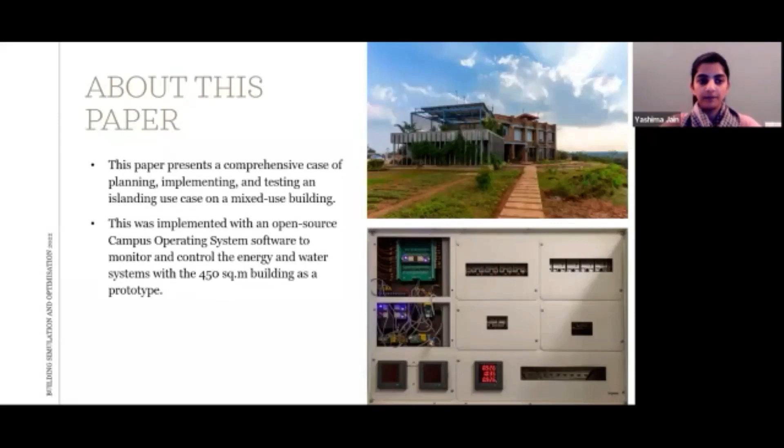A little bit about this building: it is part of a campus that embodies experimentation and mainstreaming of zero carbon and resilient development. It is a 450 square meter building with 2 stories, with an office and an environmental lab. The envelope is super insulated with efficient lighting and equipment. There's a PV array of 6 kilowatt peak and a battery of 14.4 kilowatt hours.

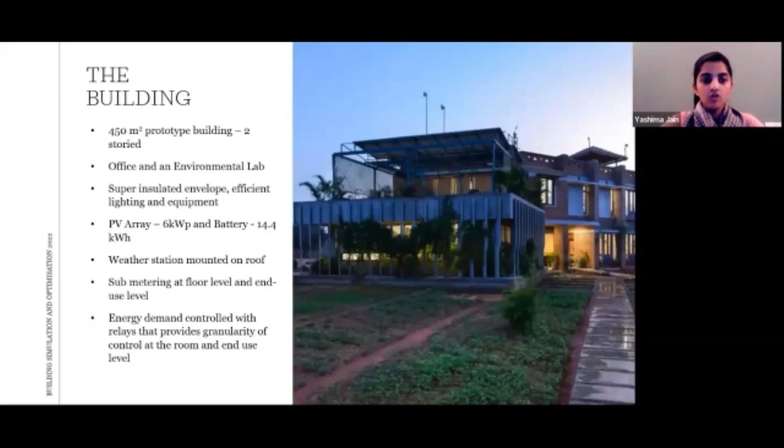There's also a weather station mounted on the roof, and sub-metering has been done at both the floor level and end-use level. Also, energy demand can be controlled at a granular level, so we can control energy at room level, end-use level, as well as floor level.

A little bit of background about this study: we all might be aware that India is on a path of major growth in renewables, against the target of achieving 175 gigawatts of renewable energy installed capacity by 2022. A total of 114 has already been installed as of June 30. This kind of penetration of renewables and an evolving demand of energy will eventually lead to the formation of a duck curve.

In developed countries, this problem has been tackled by using demand response and storage, and it has become an important part of the solution. But integrating this is definitely hard to achieve and challenging. It requires aggressive and intelligent power management along with real-time prediction of on-site renewable energy, and that's what we have done with our work, but at a very granular level.

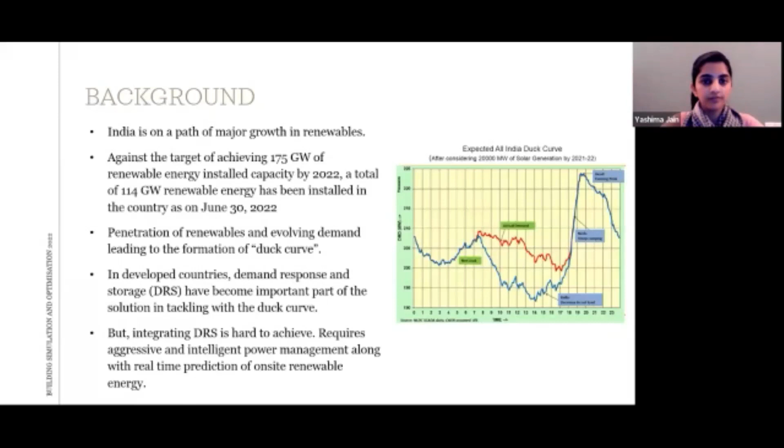I am now going to talk about the different steps that were taken to do this and the results that we achieved. The first step was the energy audit. We did an extensive energy audit to compare building loads with photovoltaic generation and understand the end-use, spatial and temporal energy use in the building.

All operational power was measured. For all equipment, light and fan, we measured operational power to understand the building loads. The comparison of the operational loads to be supported by the PV system gave the demand profile of the building when there is no grid power. The result was that building operations need more energy than that generated by the solar PV array. That's what we found out.

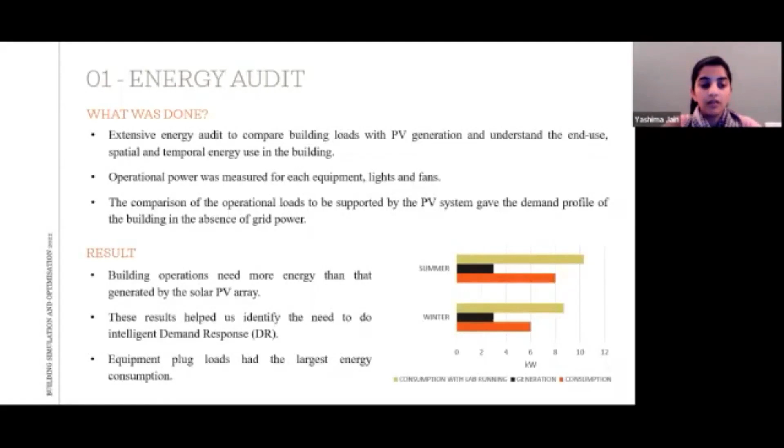The results helped us identify that we need to do intelligent demand response to cater to our energy demand, and equipment load proved to be a big guzzler. The graph on the right shows that on an average summer or winter day, generation is way lower compared to actual consumption in the building. If the lab is running, it goes beyond 10 kilowatts during summers. That's what we found out using the energy audit.

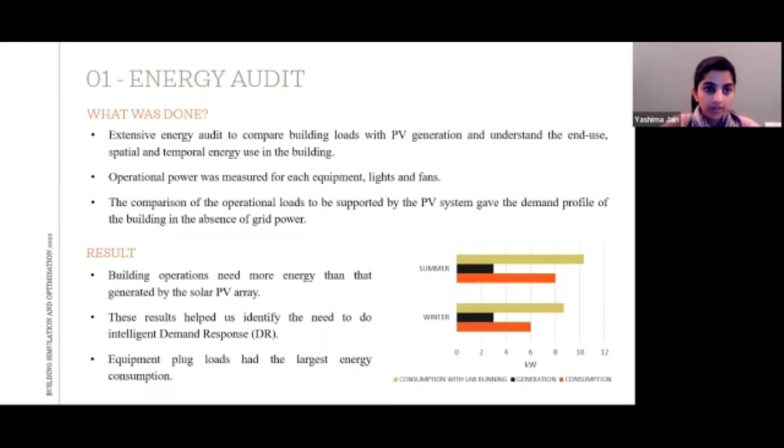The next step was to create critical load scenarios using the energy audit data and historic solar radiation. Load profiles defined critical functionality, and the idea was to create multiple operational scenarios to island the building in the absence of grid power. Inputs were taken from facility managers and users of the building to understand their requirements.

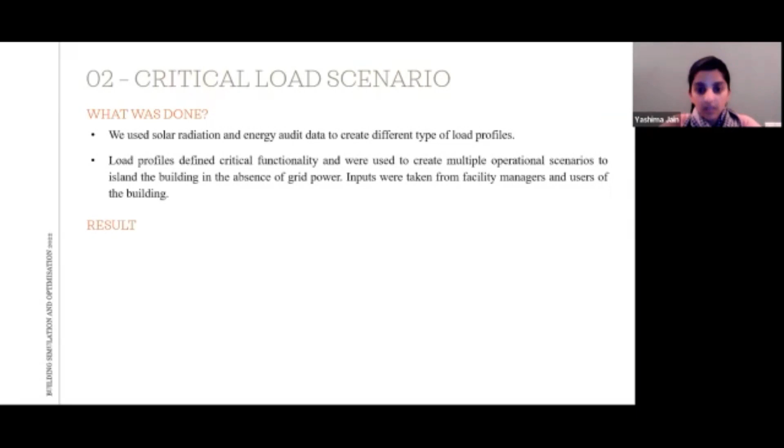These 5 ranges also helped us define the operational scenarios, which were red, orange, yellow, green, and blue, where red was the most critical scenario, where only critical equipment like IT and IoT was allowed to function.

Since equipment was a big energy guzzler, as we found from the energy audit, we managed equipment load by cycling them through the day for different kinds of uses in the building. Additionally, fans were also provided for thermal comfort in some scenarios.

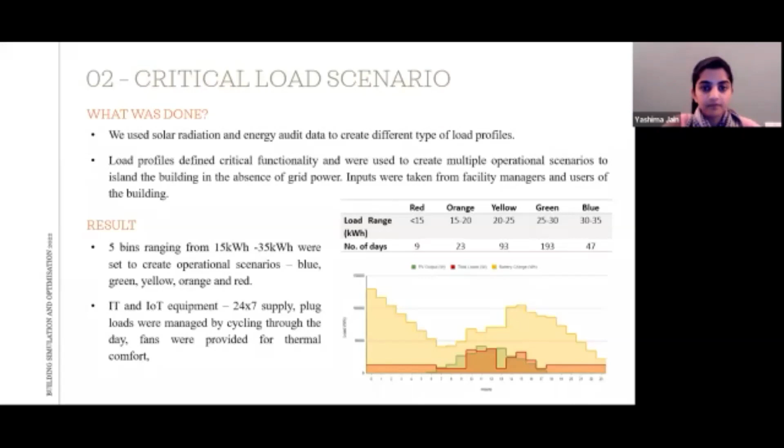The next step was to design the control architecture for this system. It was designed as a distributed system with multiple layers, and all sensors and microcontrollers were integrated in the hardware layer, which used Ethernet, Wi-Fi, or LoRa communication with the hardware. All recorded data was passed through cleaning scripts and then published to the Kafka framework at the local server.

The central server was maintained for high computational processing like artificial intelligence modeling and analytics. Coming to the results, the decision to implement a distributed architecture helped us take edge decisioning independently at the local server. The combination of Apache Kafka and MQTT proved to be a good combination for various IoT use cases, allowing us to process data in motion and not just restrict it to a pub-sub messaging level. This approach and the use of open source technology made the operating system scalable and extremely cost effective.

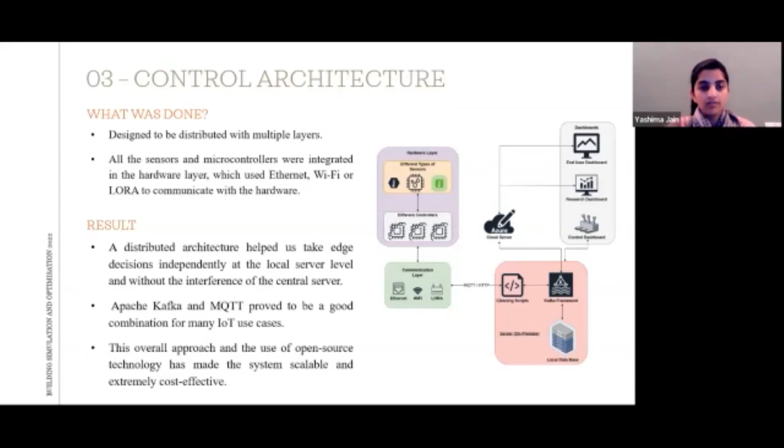The next step was software integration, where steps 2 and 3 were actually integrated. This led to the development of the operating system, where we had to align the operational scenarios from step 2 with the controls and relay architecture in the building. A part of this step was also to develop the user interface, with the aim of having an hourly level toggle for the 5 operational scenarios across different end uses as well as spaces.

Coming to the results, control at an individual equipment level was planned, but we did not implement it since it was not a scalable solution. We did control some high energy consumption lab equipment. Everything else was controlled at a floor level, room level, or end use level, including fans, lights, ACs, as well as equipment.

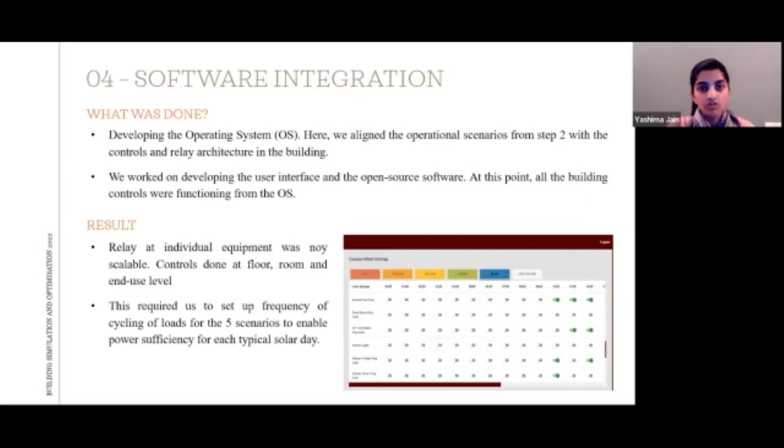The controls required us to set up frequency of cycling of loads for the 5 scenarios to enable power sufficiency for each typical solar day. The image on the right depicts the user interface on the maintenance side, which also shows the granularity of the controls developed to operate the scenarios.

Coming to the last step was the actual validation of all this work done, and we did that via actual testing in the building. As part of our methodology, we had set up protocols to test the functionality and validate the correctness at an hourly level.

The plan was to shut down grid power intentionally and let the OS take over and make decisions. The OS would decide what operational scenario the building should go into, based on forecasted solar generation for that particular day. The testing has been done twice so far and has proved successful, where the OS allowed the building to function based on the selected operational scenario.

In one of the testing sessions, the OS shifted the building into a green mode, where equipment functioned on a cycling basis for various uses as well as spaces. A combination of PV generation and battery was able to sustain the building functionality throughout the day.

The testing was done at an hourly level, where we logged the functionality of all end uses and checked for its alignment with the designed operational scenarios. This was also a validation for all our controls and their functionality.

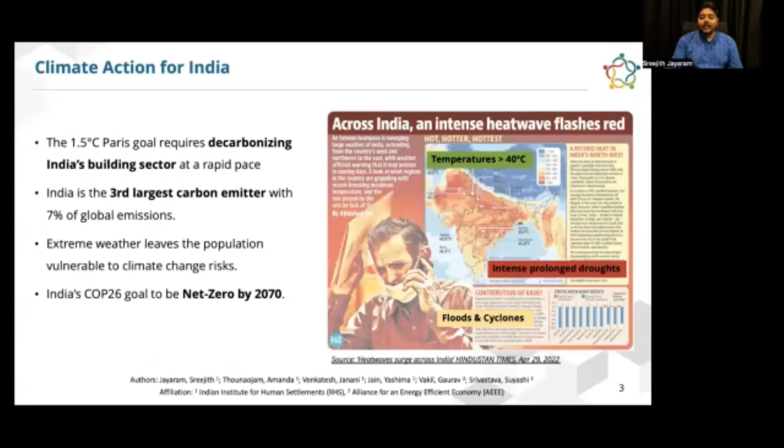This year at COP27, India has launched the In Our Lifetime campaign, which will recognize youth between ages 18 to 23 to become message bearers of sustainable lifestyles. In addition to the climate goals set by India for 2070, it is also predicted that India will add about 40 billion square meters of building area by 2050. These can be designed and built as net zero energy buildings.

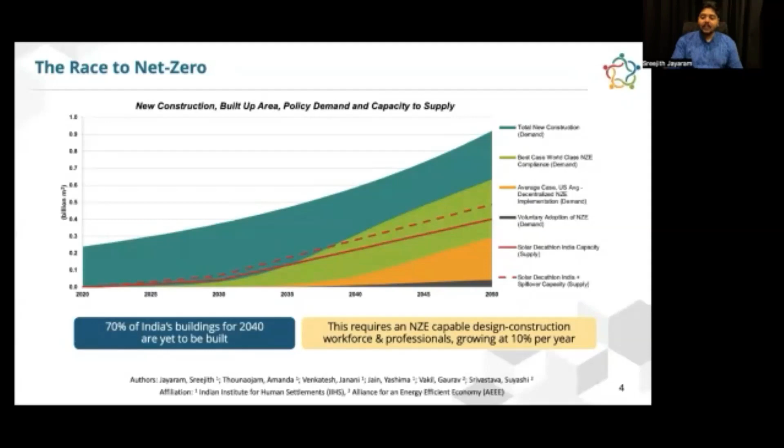In order to provide grounded evidence-based designs to achieve our ultimate vision of net zero. Training programs for building performance simulation have not captured the imagination of students or professionals to get them excited about the race to zero.

We are attempting to address this gap in BPS education through the Solar Decathlon India program. It is a competition for collegiate students to design net zero energy and water buildings. They work on live projects by partnering with real estate developers in the country.

Across the 2 years, Solar Decathlon India saw 2,200 plus students who participated in the program, partnering with real estate developers. The authors analyzed the work done by the finalist teams of both years. The teams worked on 10 contest areas, hence the term decathlon, and had to do well across all contests to win.

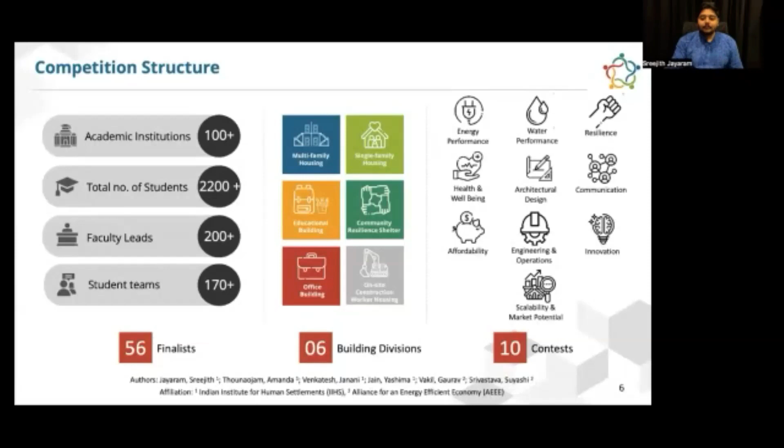In order to build the capacity for the teams to design net zero energy projects, the SDI program provided them various resources such as 10 online self-learning modules and webinars which mirrored the 10 contest areas of the competition. We gave them simulation software and calculation tools for costing and water consumption.

From the learnings of year one, the program provided BPS training to enable the teams to provide evidence-based designs. The teams had access to a technical resource group comprised of young professionals working in the industry. The real capacity building happens when the multidisciplinary team is able to apply these learnings to a real world problem which they worked on for the competition.

At the end of the finals, the authors wanted to know how well these teams were able to produce evidence-based design. As part of our analysis of student work, we wanted to know whether teams proposed energy conservation measures for their project, and importantly, whether the student teams were able to provide evidence in the form of simulations for the strategies they were addressing.

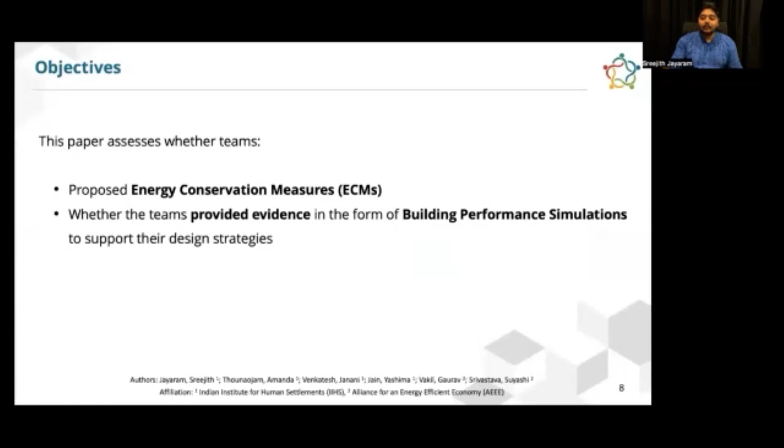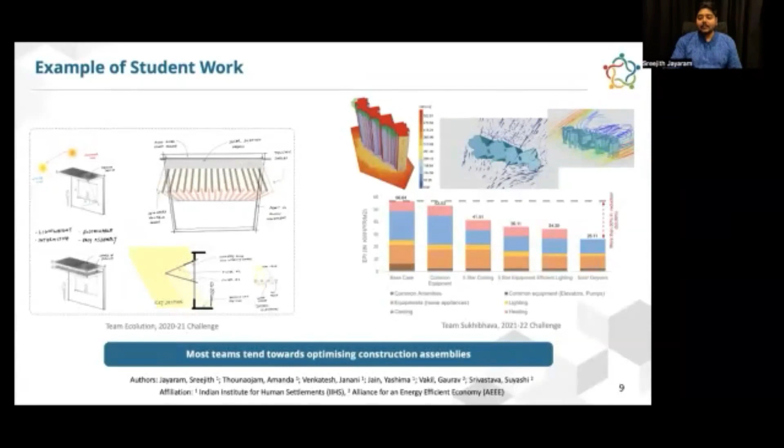We did a detailed analysis to look at the work produced by the students, which we will see now. Comparing the 2 years, we found that in total, about 86% of the teams proposed ECMs in their designs.

Similarly, there were about 12 to 21% more teams who provided BPS as evidence for strategies related to building envelope, which includes optimization of wall roof assemblies and shading. There were 10% more teams who presented BPS as evidence for passive design strategies such as form optimization and orientation of their building design.

There was a drop in the number of teams who provided evidence for window to wall ratio optimization of the building envelope. The percentage of teams providing evidence for HVAC strategies were roughly similar in year one and year two.

The natural ventilation strategies, which had the least number of teams providing BPS in year one, saw an 18% increase in year two. Overall, on average, there was about 12% more teams who provided evidence in the form of simulations for their proposed designs. There were some interventions and improvements that the organizers made in year two which may have yielded these results.

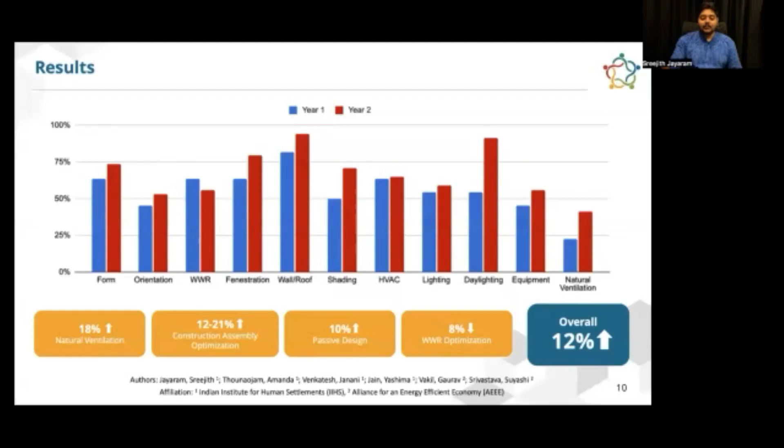Many of the areas of study are new to the teams and are not part of their existing curriculum. The teams were not aware of these topic areas and found it difficult to provide evidence. The teams may have had difficulties in receiving training in building performance software.

For year two, we included a 5-part simulation training program and faculty development program as part of the program schedule. We refined the requirements of the competition and made them more comprehensive.

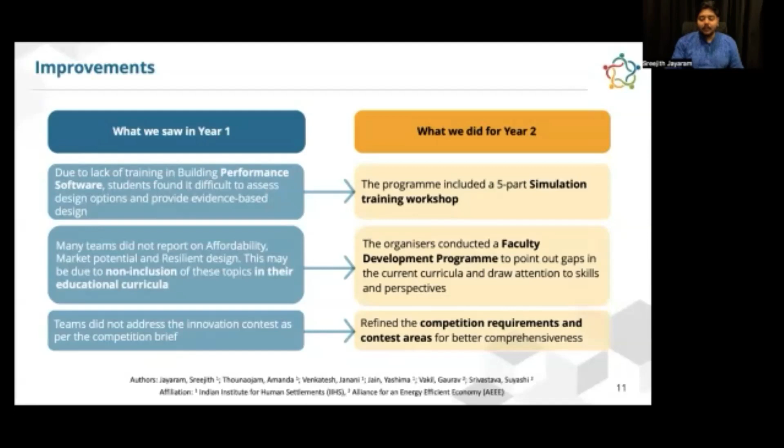Even though the organizers made improvements, a bigger change would be needed to have a larger impact. In India, the national statutory bodies which govern the technical education curriculum offer courses on climate analysis, passive design, and energy efficiency to architecture and engineering related coursework. However, these are not mandatory and are not comprehensive as well.

Specific coursework related to building performance simulation for energy, thermal comfort, daylighting, artificial lighting, and natural ventilation are not offered by the curriculum. As organizers, we look to further work on policy change for education and for market transformation in the building sector.

Comparing the student work in year one and year two, the program was able to see a 12% increase in evidence-based design by about 2,000 plus students. Bringing about a curriculum integration of the program can definitely amplify this impact.

The national statutory bodies will need to formalize BPS education to be able to do this curriculum integration. In the coming years, the organizers are looking to identify gap areas so that the teams will have access to more resources and better BPS education to help them arrive at evidence-based designs. The next generation will need to be prepared for the clean energy transition as well as for adaptation.

We are honoured to have Professor Rajat Gupta from Oxford Brookes University, who will be representing a team both from his institution and from the CLASP India programme and Environmental Design Solutions PVT Limited. Their study is titled Examining the Variation in Daily and Peak Electricity Use in Urban Indian Households by AC Ownership. Rajat, I could confirm we could all see your presentation. Brilliant, thank you, Kian, thank you for the introduction as well. So what I'm going to do is present this live and talk a bit about the work we are doing as part of a larger Indo-UK project called Reside.

Here we focus on a data set provided to us by CLASP India and the Environmental Design Solutions. The focus is to look at the variation in daily and peak electricity use across a small sample of urban Indian households by extent of AC ownership. So what happens if you have one AC unit versus two, or three or more.

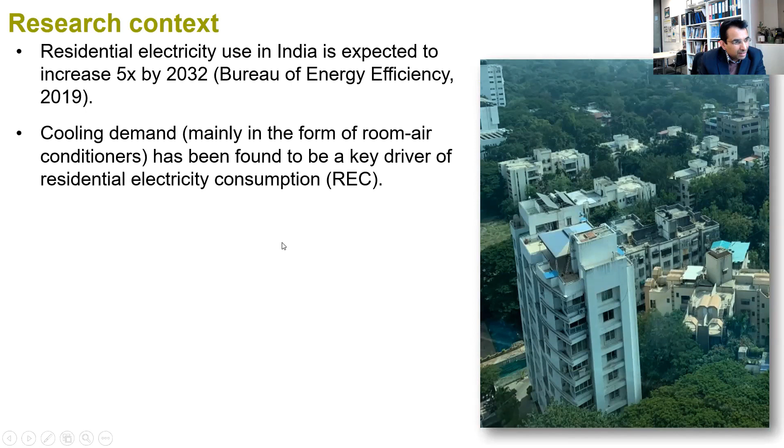To give a bit of research context, residential electricity use in India is expected to increase 5 times by 2032, according to the Bureau of Energy Efficiency's estimate. We also know that cooling demand mainly comes from room air conditioners, which is the key driver for residential electricity use in India.

This is happening despite a couple of facts. First, India has one of the lowest access to cooling across the world, with per capita cooling consumption just under 69 kilowatt hours against a global average of 272 kilowatt hours. This fact was also stated by one of the keynote speakers. Also, India has the highest distribution of cooling degree days anywhere in the world, meaning this is likely to increase with a warming climate. So the situation is only going to get worse from a climatic point of view.

At the same time, it is predicted that air conditioner sales are going to explode from 42 million three years back to about 240 million. That's a lot of increase, just under 6 times. So clearly, there's going to be a significant rise in residential electricity use in India.

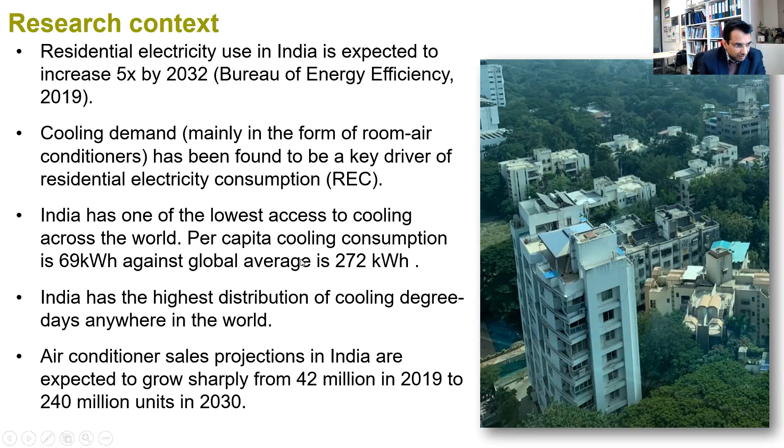It's very important and probably necessary now to examine the pattern of residential electricity consumption, not just from models, but from actual empirical data, to really identify the peak periods of electricity use, so we can develop measures to either reduce its use or at least manage it so we don't cause brownouts and blackouts.

So what we did here was conduct statistical analysis of high resolution time series data on electricity use. Essentially, we looked at the variation in daily and peak electricity use by seasons, summer and monsoon, since that's where most of the air conditioning is likely to happen.

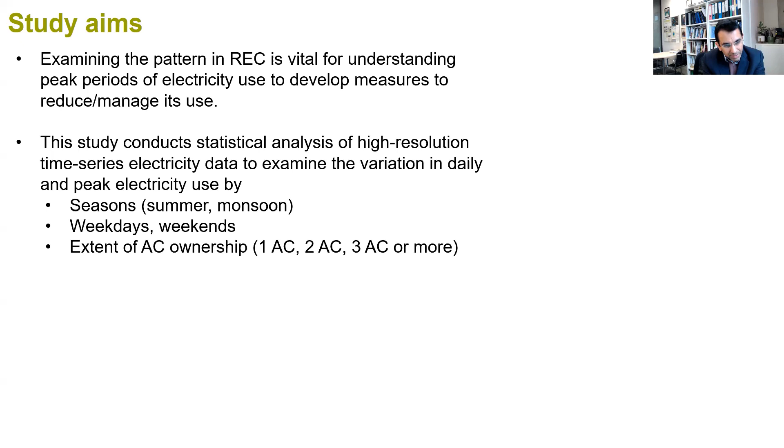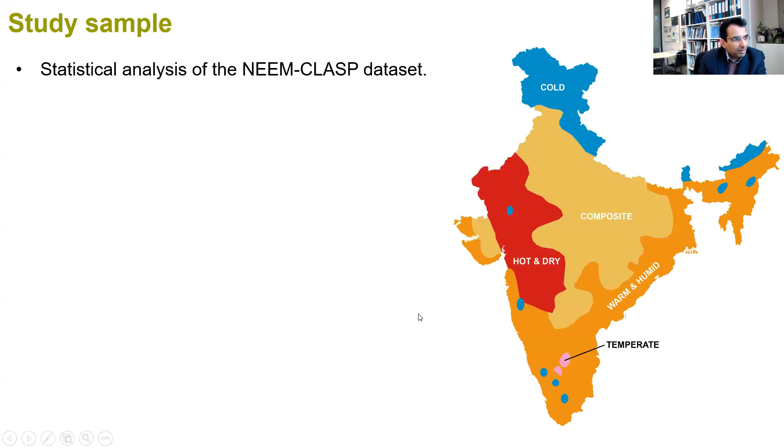The study is part of this wider 5-year project called Reside, with colleagues in MNIT Jaipur and IIIT Hyderabad, and there's a whole website. I think we're going to talk about some of these projects tomorrow. The study sample was really based on the data set provided to us by NEEM CLASP.

The households were located across 3 climatic zones where air conditioning use is dominant: the composite zone, the warm humid zone, and hot dry. That largely covers most of geographical India. There's obviously the cold zone where hopefully we don't have that much air conditioning, and a little bit of temperate zone.

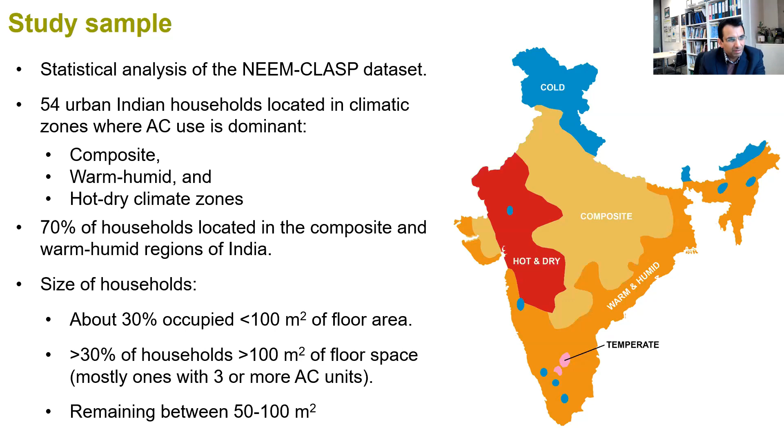70% of the households in the sample were located in the composite and warm humid zone, and the remaining 30% were in hot dry. In terms of size of households, they were between 50 to over 100 square meters — 30% less than 100, 30% just over 100, and the remaining 50 to 100 square meters — similar to other studies done nationally in terms of household size.

In terms of methods, we had time series data collected every 30 seconds between January to November 2018. This is pre-COVID, so we didn't have that influence of home working yet. The data collected included electricity use, peak demand, power factor, voltage, and frequency.

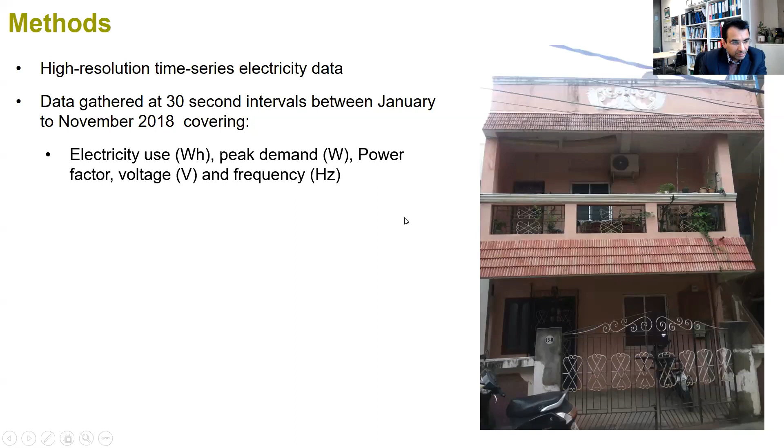We then conducted cluster analysis using K-means to identify typical profiles of electricity use. We presumed that the summer season, which can differ since India is a vast country, was essentially the drier season, April to June, and the monsoon season from July to September, where humidity is high but ambient temperatures are slightly lower than summer.

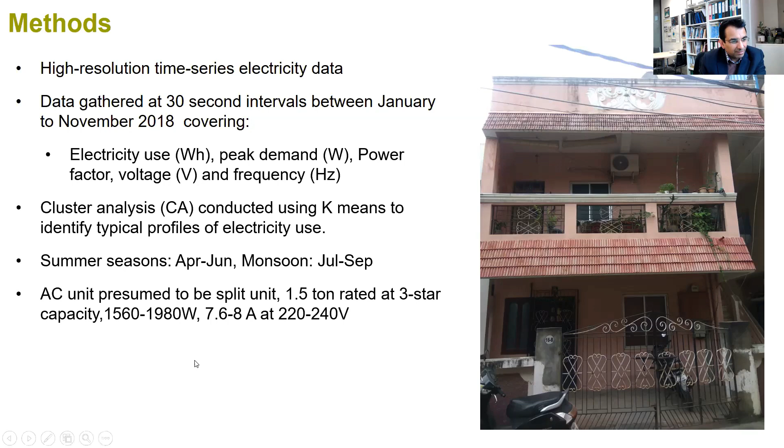The dominant form of air conditioner unit present in the sample was a split unit, about 1.5 tons and 3-star rated. The amperes it has is 7.6 to 8 amperes, which we assumed to predict the air conditioning usage.

We looked at the compressor on-off cycles, and by locating those events within the electricity current, we could predict when the current increases above the rating of a 1.5 ton air conditioner. For over 30 minutes, we knew that the air conditioning is coming on. We then automated that process for the entire data set, so you can imagine there was a lot of data to look at.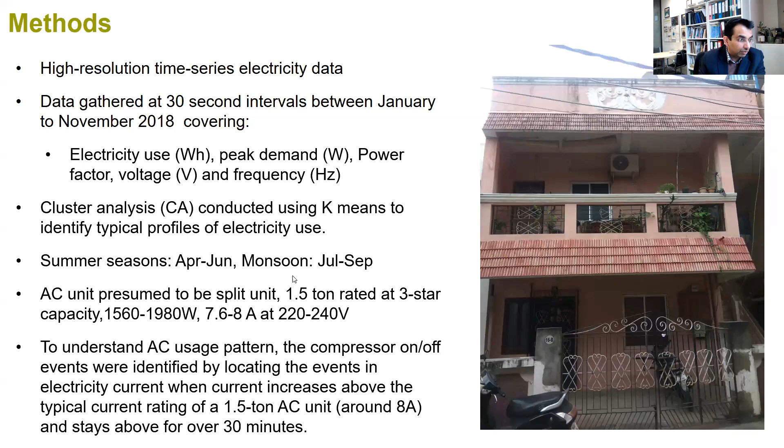I'll go into the results now. Looking at the variation in annual and seasonal electricity use, it was evident that there was variation as you move from homes with one air conditioning unit to 3 or more. That became obvious whether you look at mean annual electricity use, which goes from 3,500 kilowatt hours to 5,500 kilowatt hours for 3 or more AC units, or mean daily electricity use, where 19 kilowatt hours for 3 or more ACs is double that of a one-AC household. Even when you normalize by area, you get very similar results.

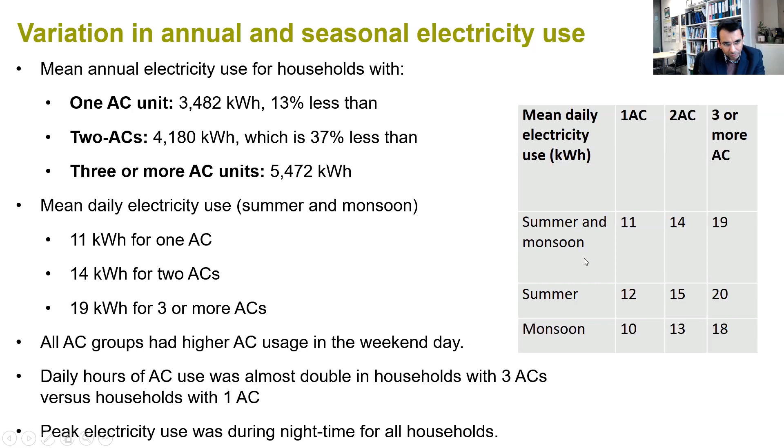This happens whether you look at summer and monsoon season combined, or summer or monsoon separately. Most of these households had higher AC usage during the weekend, and the daily hours of AC use in households with 3 AC units was almost double that of one AC. Most of the peak electricity use was during nighttime, and I'll talk more about that in one of the slides later on.

When we talk about air conditioning electricity use, the summer and monsoon seasons accounted for about 60% of annual electricity use, so this is a major period of electricity usage. Air conditioning use in households with 3 or more AC units was about 43% of summertime usage, and about 34% in the monsoon season - slightly lower in the 2 AC and 1 AC households. So as India starts to urbanize more and multiple air conditioning units tend to get installed, the situation is going to get much worse.

For the moment, there is no centralized air conditioning in homes - majority-wise it tends to be room-based. The mean annual contribution of AC use as a proportion of annual electricity use is about 10% in a 1 AC household, increasing to a quarter, 25%, in 3 ACs. So there's a big difference as you have more AC units.

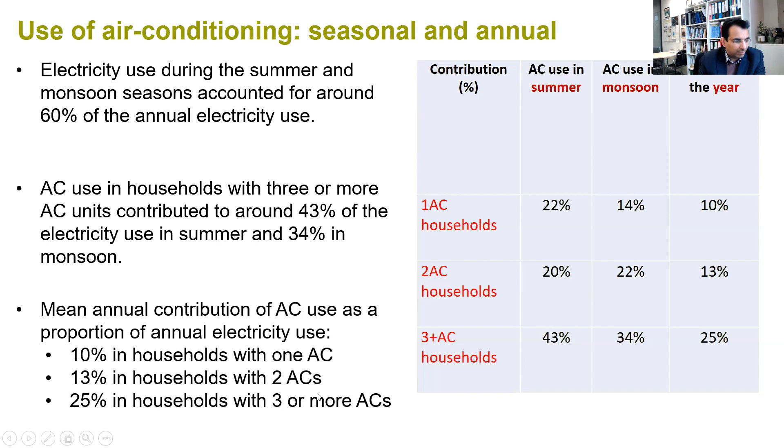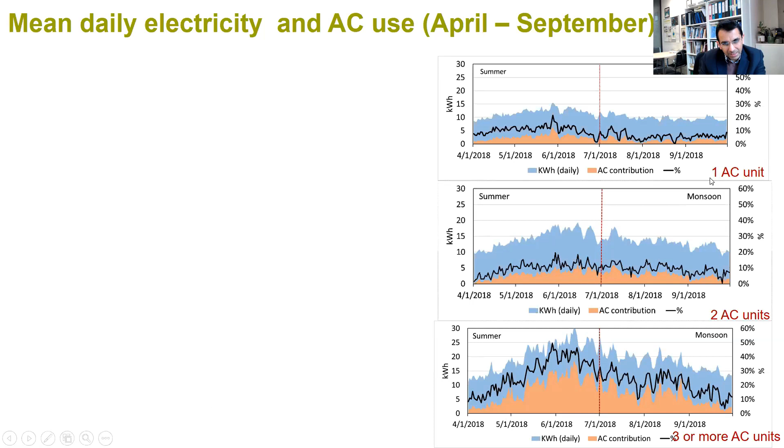We then plotted the entire data set, from April to September, to look at how electricity use overall was varying - what was the air conditioning use in a 1 AC unit dwelling, 2 AC, and 3 or more. We wanted to see for how much time air conditioning had been used in these 2 seasons, and it was up to 38% - a significant amount of time.

What's interesting is that daily electricity use and proportion of AC use is higher in summer than in monsoon season. This is interesting because in the summer season, which is drier, you could have other means of providing comfort, like an evaporative cooler, since you don't have as much humidity compared to the monsoon. So there are areas for saving energy there.

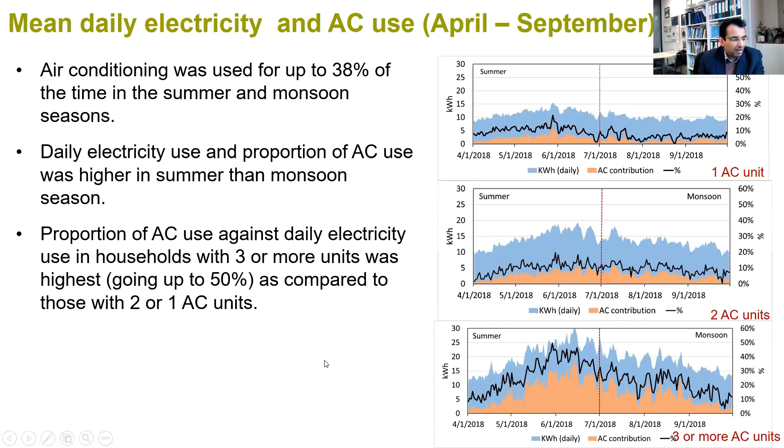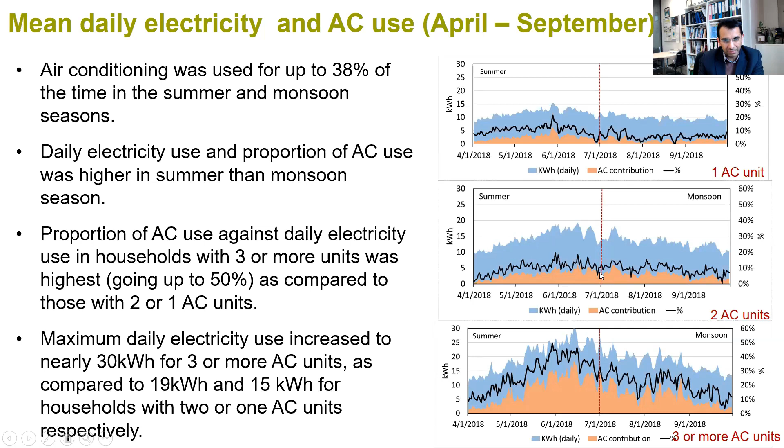When we look at proportion of AC use against daily electricity use - the amount of AC used over a day - especially in households with 3 or more AC units, it can go up to 50%, as you see here, compared to those with 1 or 2 AC units. The maximum daily electricity use in 3 or more AC unit households goes up to 30 kilowatt hours, which if you read off the y-axis, is double that of 2 AC and 1 AC units, which stays around 15 or under.

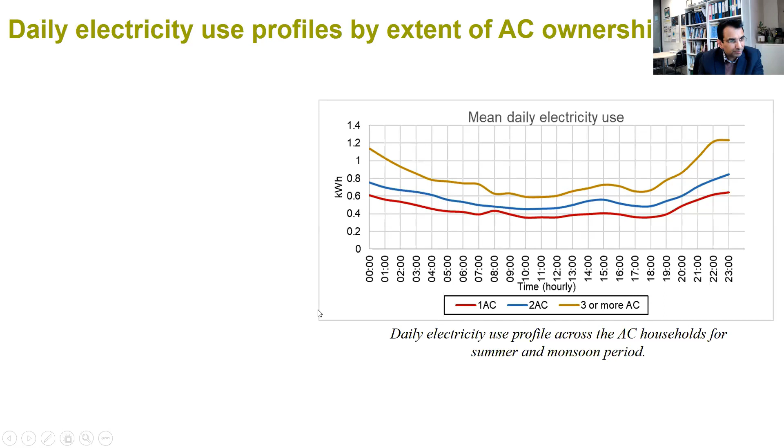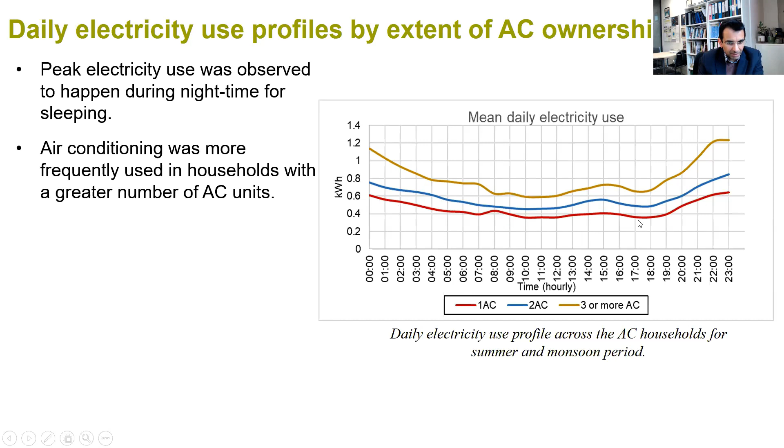Then we started to look at daily electricity use profiles, because we wanted to see what magnitude of electricity use was happening and when. As I said, peak electricity use was observed to happen during nighttime, essentially for sleeping purposes. Looking at air conditioning across these three lines - one for one-AC dwellings, one for two, and one for three or more - although they have a similar trend, you can see AC is used more frequently in dwellings with three or more AC units.

When we look at the amount of electricity used during the peak period, in three or more AC unit dwellings it's about 6.3 kilowatt hours, versus 4.6 kilowatt hours for two AC units and one AC unit dwellings. The most frequent usage of AC was recorded at nighttime from 8 p.m. to 2 a.m., for overnight and late evening activities.

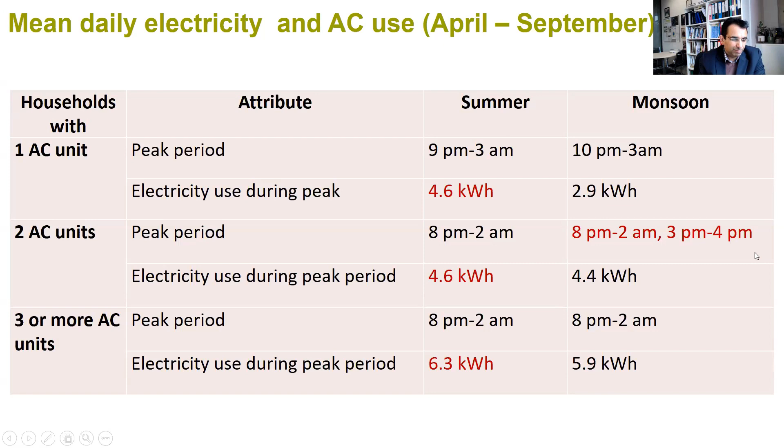This table clearly shows that 8 p.m. to 2 a.m. is really the peak period of electricity use, largely for air conditioning. But there's also an afternoon period where air conditioning is used, probably for resting purposes.

We also ignored the 1, 2, and 3 AC groupings and just took the 54 dwelling sample and applied cluster analysis to see what kind of clusters we get and whether they'd differ in terms of indoor electricity use profiles. Actually they weren't very different. Two clusters emerged, and again they have very similar profiles in terms of late night peak period.

So essentially that provides an opportunity for some management of air conditioning in smart ways to reduce its usage.

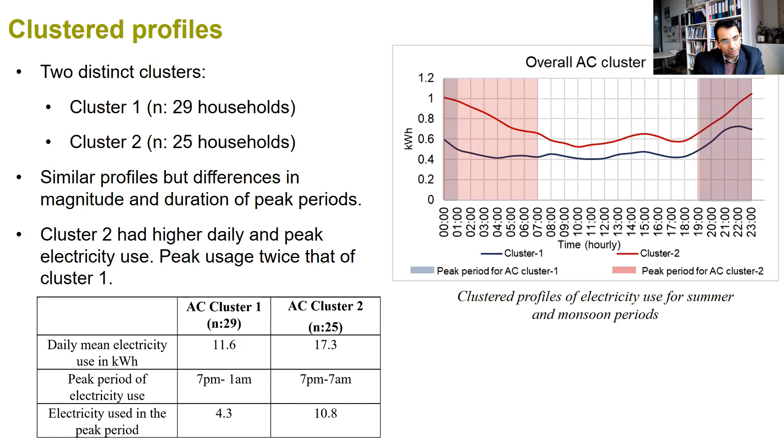What's interesting is cluster 2 had mostly 3 or more AC unit dwellings, and there the magnitude is much higher than cluster 1 in terms of electricity used during the peak period. The daily mean electricity use of cluster 2 is pretty high, around 17.3 kilowatt hours versus 11.6 in cluster 1. So the point is that even if dwellings are air conditioned, within that grouping you can have a lot of variation depending on the number of air conditioning units present.

So what are the key findings and implications of this? It's very data intensive, with a lot of data crunching going on. But what are the key takeaway points?

First, seasonal differences matter in India - summer and monsoon season contribute about 60% of annual electricity use. We also know AC usage in these seasons contributed around 25% of annual residential electricity consumption, and about 50% of daily electricity use on some days.

The extent of AC ownership matters because households with 3 or more AC units can have double the daily, seasonal, or annual electricity use compared to one-AC households. That's a really interesting finding because most households will be progressing from 1 to more AC units. Similar patterns of AC use were observed in summer and monsoon seasons for all households, irrespective of the extent of AC ownership.

There is a nighttime peak, although the magnitude of that peak and the peak usage period might be slightly longer or shorter depending on the extent of AC ownership, but the trend remains the same - mainly concentrated during nighttime from 8 p.m. to 2 a.m., with an hour of peak use in the afternoon in some dwellings.

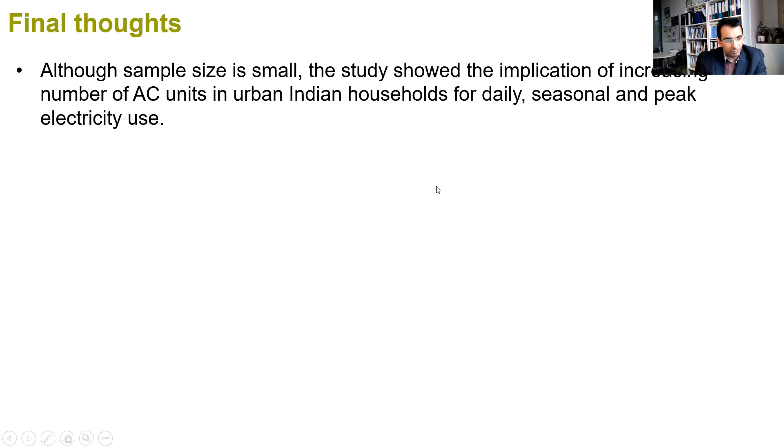So what do we take away from this? First, there's obviously a limitation that this is a study with a small sample size of 54, although the amount of data collected is very data intense and in depth. It does show that if you increase the number of AC units, there are huge implications for daily, seasonal, and peak electricity use, which has implications for the local electricity network.

Some effort needs to be made to increase the use of desert coolers, for example, with fans possibly during the summer season where humidity levels are lower, and that could reduce the usage of air conditioning, especially in homes with 3 or more AC units.

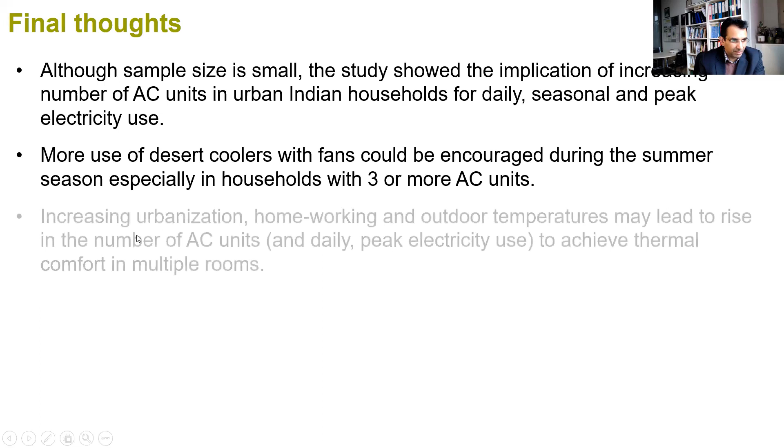We also know this is going to get much more difficult to manage because with increasing urbanization, home working as a result of the pandemic, and outdoor temperatures rising due to a warming climate, that will lead to a rise in the number of AC units to achieve thermal comfort in multiple rooms. So essentially it's no longer going to be just one living room or a bedroom - multiple spaces might start getting air conditioned, and this is already happening. We've recorded about 10 to 12 AC units in one dwelling as well.

So this is getting to a point where it needs to be managed, because policy measures could be targeted based on the extent of ownership of AC units, so that peak load management could be done through demand side response.

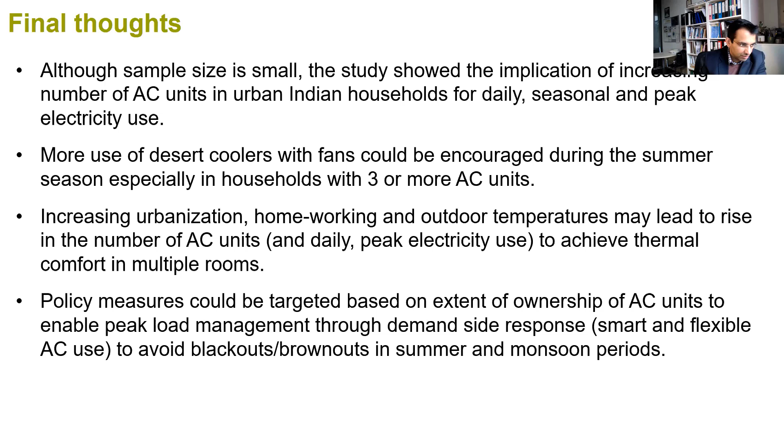Because some amount of air conditioning is probably going to happen, smart and flexible AC use is becoming necessary - managing air conditioning in line with external weather and grid signals so we can avoid blackouts and brownouts. Maybe the new generation of AC units need smartness built in alongside their Energy Star ratings. Without a robust demand side response strategy, driven by time of use tariffs, other DSR signals, or availability of renewables locally in the grid, electricity distribution companies in India may need to make expensive and disruptive reinforcements to the network, and that's something to be avoided. If we can manage this smartly and flexibly, avoiding the increase in number of AC units and keeping it between 1 and 2, that could halve the increase in electricity use expected in India over the next 10 years.

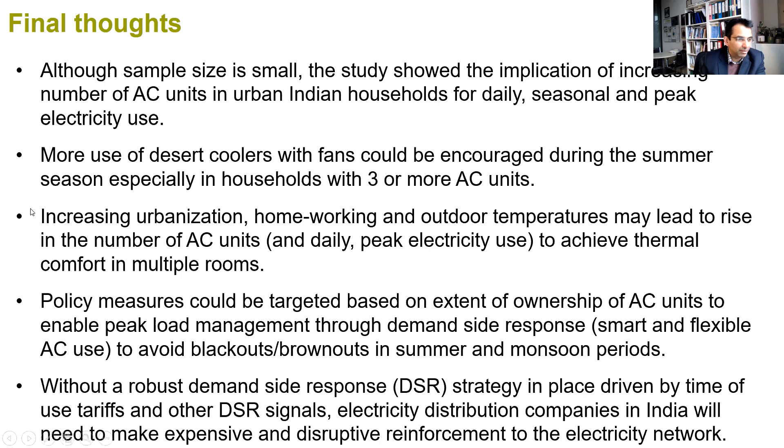Thank you very much. I'm going to stop because I cannot see anybody and I'm sure I've run out of time. I'm going to stop sharing as well.

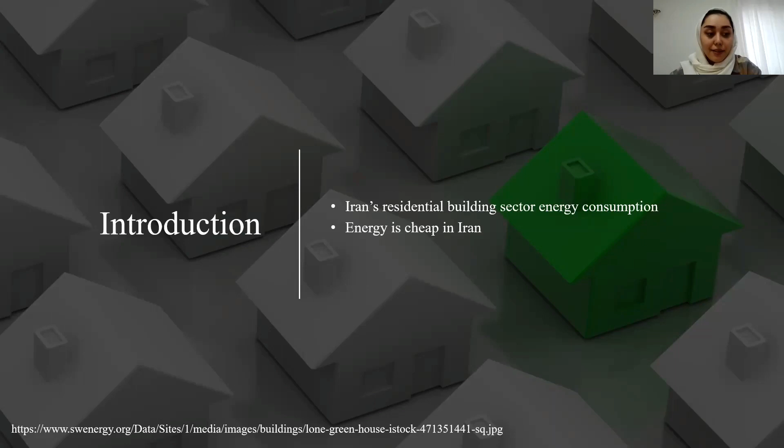The research objective of this study is to retrofit a residential building in Tabriz, Iran, to show the importance of sustainable retrofit for decreasing building energy consumption and CO2 emission, and also to determine the most effective scenario to get the best result.

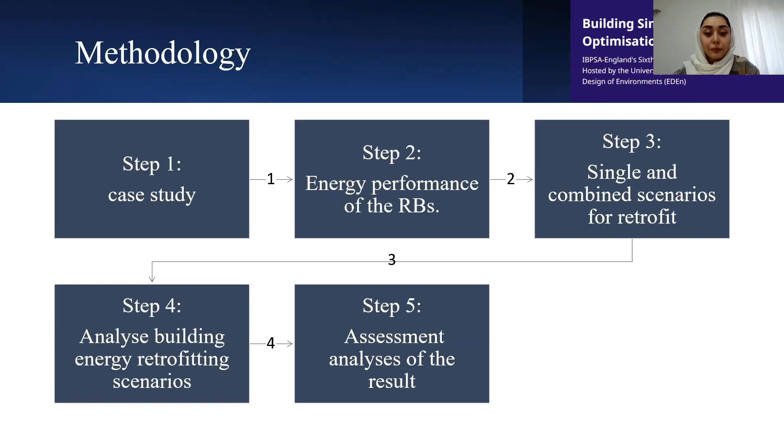To fulfill this research objective, 5 steps are needed. The first step is to determine the case study building and the climate conditions. The second step is to calculate the energy performance of the RBs - we call it RB because it's a reference building. In the third step, determine the scenarios, which is the combination of single and combined scenarios. The fourth step is to analyze building energy retrofitting scenarios, and the last step is to perform assessment analysis of the result. So let's look at the case study.

The case study is located in Tabriz in the northwestern part of Iran, which has a cold and dry climate. The average daily temperature in summer in Tabriz is 27 degrees, and the average daily temperature in winter is equal to 8 degrees. This is the residential building - it has 4 floors, each floor has an area of 183 square meters. This case study was modeled with DesignBuilder software.

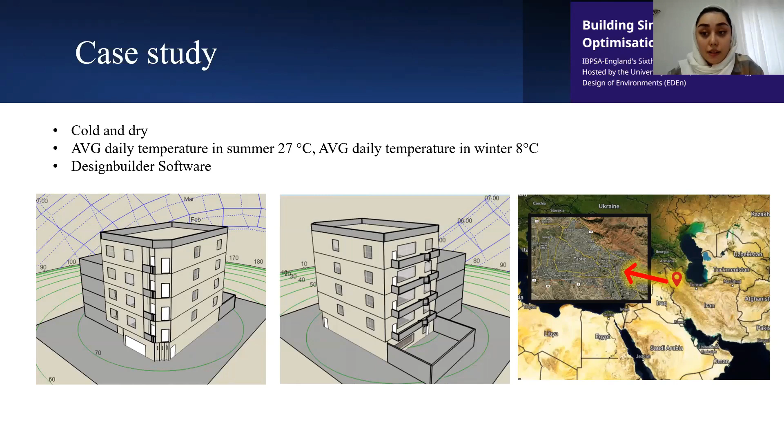4 scenarios have been considered. The first scenario is the combination of replacing single windows with double glazed windows and adding some shading elements on the south facade. The second scenario is about replacing lighting fixtures with LED and applying some wall insulation. The third one is about applying PV panels on the roof and again wall insulation. The last one is the combination of all the above scenarios.

Let's look at them in a little more detail. In the first scenario, we assume that double glazed windows replace the single glazed windows, with 30 millimeter argon gas. The shading elements are located on the south facade at 30 to 35 degrees, which work only during the summer period. In the second scenario, LED lighting fixtures replace simple incandescent lamps.

As you know, LED lamps can save energy from 30 to 90%, and LED lighting is mercury-free. They also generate less heat, so it's really good for sustainability.

For external insulation, I'd like to show you these figures. The left one shows the wall detail before applying insulation, and the right shows the detail after insulation. The insulation material is expanded polystyrene with 10 centimeter thickness, which can save a lot of energy.

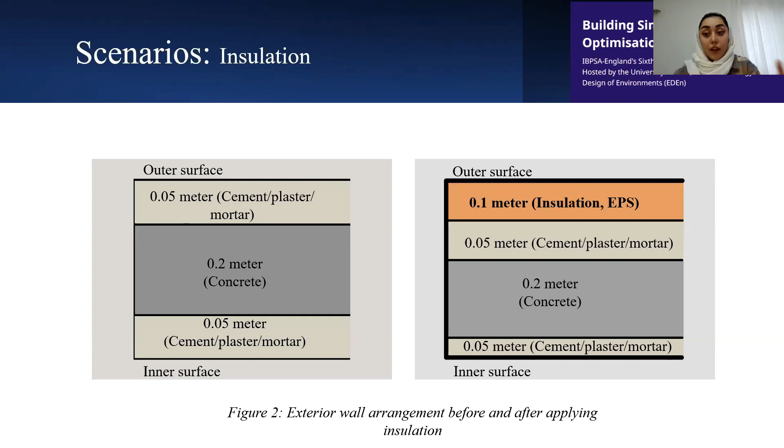Back to the third scenario, which is the combination of PV panels and insulation. I'd like to show you Iran's high potential to use PV panels, which is why we used PV panels for this case study. 54 PV panels have been applied, and the panel size and information were calculated with the PV*SOL software.

Here is the result of CO2 for the reference building and scenarios. As you can see, in this third scenario and the combination, the last one, the amount of CO2 from May to October is negative. Again, given that it's impossible, this refers to the net energy building for carbon.

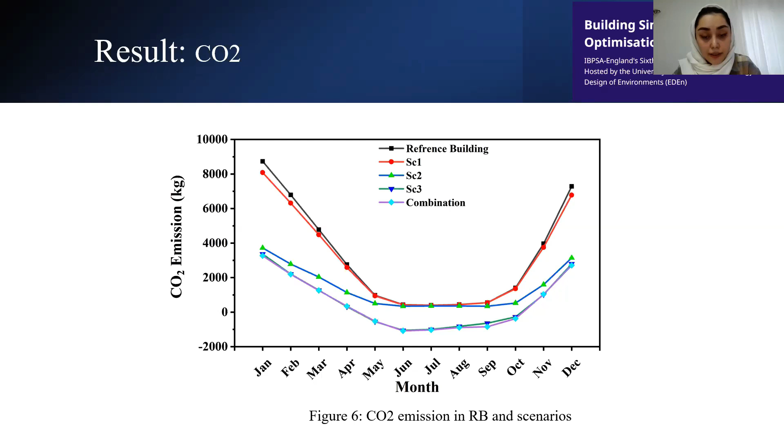So by lowering heat loss, insulation reduces the demand for gas or central heating. Therefore, in any country, a good government policy strategy may reduce carbon emission at the building and urban scale.

The third scenario, the integration of PV panels and insulation, is equal to 61, and the last one, the combination of all of them, is equal to 63. So the best one is the integration of insulation and LED, and we can see this difference from the natural gas and other rows.

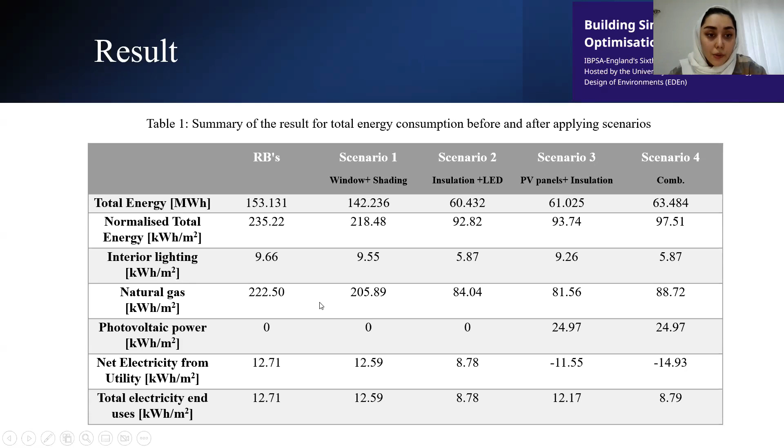Here's the conclusion for this part. This is the primary energy table, and again it shows the retrofitted scenarios results. I'd like to say that the results show that the use of these retrofit scenarios has a positive impact, considering that Tabriz is located in a cold climate and winter is really freezing there.

In the second, third, and fourth scenarios, which include external wall insulation, we see the best energy consumption reduction for heat loss. Therefore, this research confirms that applying an external insulation layer can be helpful in the climate of Tabriz.

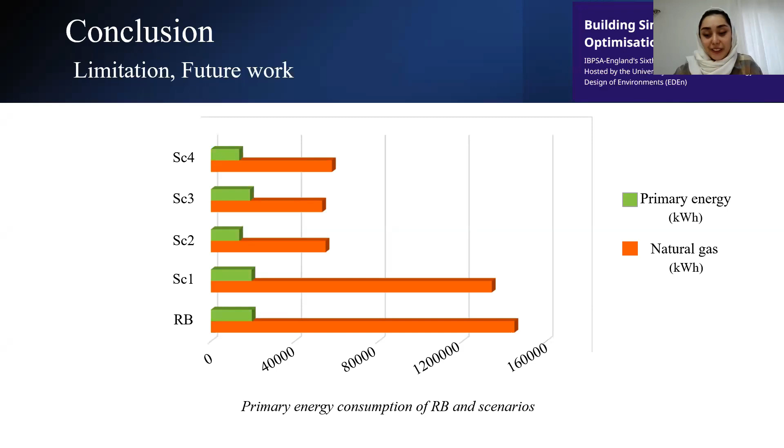For future work, researchers can work on the cost analysis of these scenarios, and also solar collectors for the reduction of hot water use. This is the end of my presentation.

I'm not sure that I catch the question. What type of PVs did you use? I know there's some data there, but it's very, very small, so the parameters, if you could just shed more light on them, because they're quite small, I can't really make them out. Yes, here, you mean? Here's some for the panel size dimensions and the distance of the panels that they are going to locate in the roof. Okay, thank you.

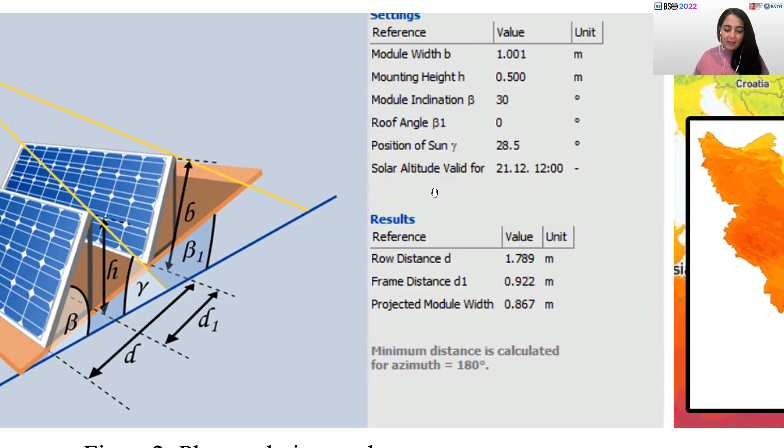Thank you very much. I have another question for you, if you don't mind. A lot of the work today talked about demand side response. How do you see this strategy working with your retrofit scenarios, and also the fact that you are integrating renewable energy? For this case study, and I work in Tabriz, so for the demand, I think if we consider good retrofit options, we can reduce the demand for the energy with some renewable retrofit options. So it could be good for some retrofit case studies.

Thank you, and I don't see any questions coming in because I think your presentation was very clear. So perhaps I have time to ask you one more question. You mentioned that Tabriz is in the colder part of Iran, and with the implementation or execution of insulation, have you thought about overheating risk in the summer as well? Yes, it could be. For the cooling part, maybe we need to use more cooling equipment during the summer, but we just focus on the winter part because in the summer we have other options, but in the winter we need to try to save the energy inside of the building.

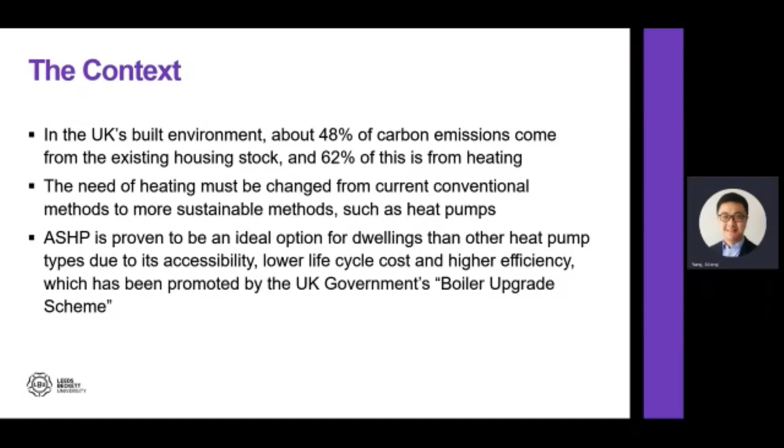In terms of heat pump technologies, air source heat pump is proven to be an ideal option for dwellings than other heat pump types due to its accessibility, lower life cycle costs, and high efficiency, which has been promoted by the UK government's boiler upgrade scheme. However, air source heat pumps' efficiency tends to decrease during periods of severe cold, for instance when the ambient temperature drops to 0 degrees Celsius, weakening its heating performance. Consequently, the building fabric certainly will need to compensate for the loss of thermal heat.

However, according to the Housing Survey of the UK, 20% of housing stock in the UK is more than 150 years old, and 40% was built before 1944, which comes with less insulation leading to heat dissipation through building fabric quickly. Therefore, it is crucial to have a massive program of retrofitting the dwellings to prevent heat wastage.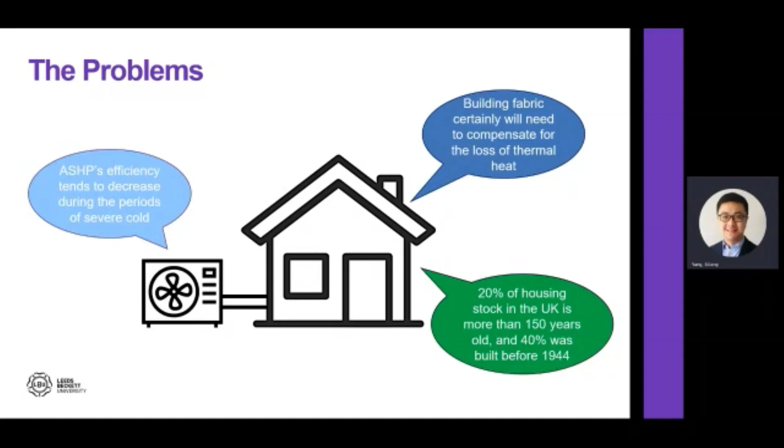So, it is pretty clear that the gap between the adaptability of air source heat pump and uninsulated homes should become the focus of research within the built environment, which has sought to explore the possibility of a balanced solution. However, questions still stand on whether a sustainable heat source is sufficient alone to reduce a household's carbon footprint without adequate insulation of building fabric.

Therefore, this study aims to investigate the benefits and drawbacks of different insulation types of typical UK dwellings when paired with conventional gas boilers or air source heat pumps, for reducing domestic heating energy demand and carbon emission and improving energy efficiency and overall feasibility. This study, however, will serve as a role model for the synergetic research and development of low-impact domestic HVAC systems and housing retrofits within the global south context, in response to environmental deterioration.

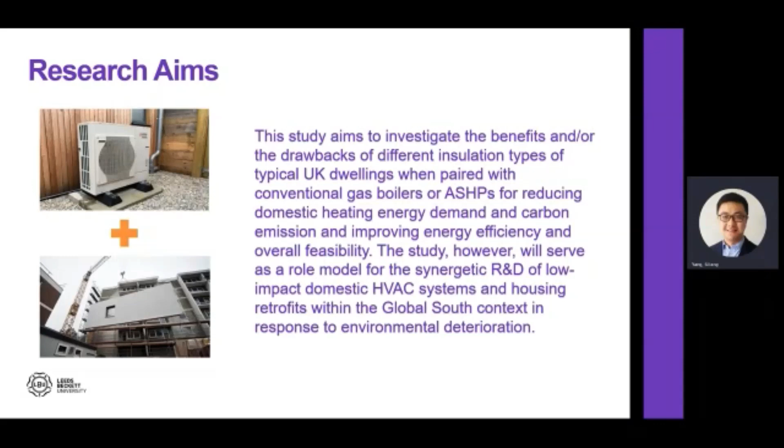In terms of the research methodology, this study was based upon simulation modeling using IES. Basically, 3 separate heating systems and the building fabric insulation pairings were used to provide different systems characteristics and admittance properties for a case study dwelling of a 2-bedroom bungalow in London.

Specifically, the 3 scenarios are gas boiler with adequate insulation, air source heat pump with adequate insulation, and air source heat pump with inadequate insulation. Typical construction design options, including the thermal properties of the 3 dwelling scenarios, were used within the IES models. Due to time limits, other information on the simulation modeling is not included in this presentation.

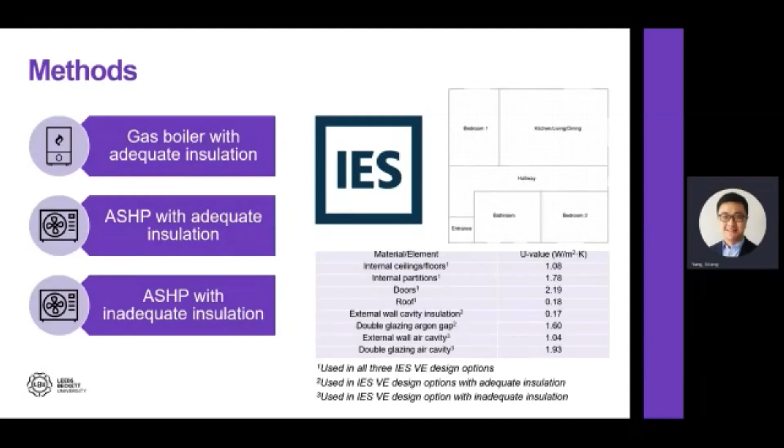All the results of the proposed study were based on a full year cycle for three aspects: total system energy consumptions, total system carbon emissions, and external wall transmitted heat losses.

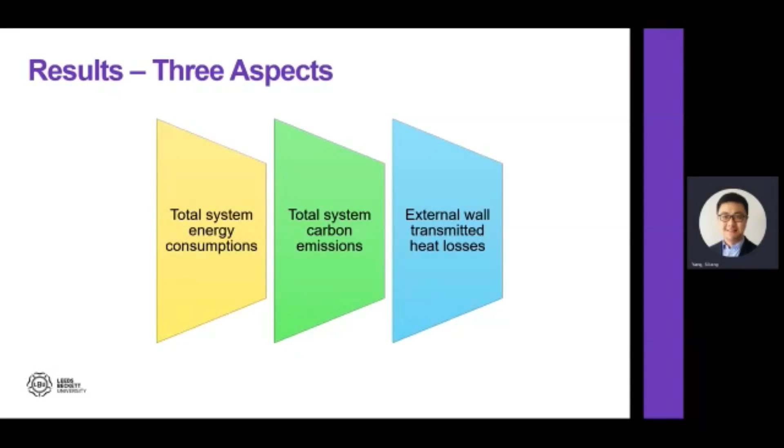Regarding the total system energy consumptions shown in the figure, both air source heat pump scenarios showed a significant reduction in system energy consumption in winter months compared to the gas boiler scenario. With adequate insulation, the biggest disparity was found in January, in which the air source heat pump was about 53% more efficient than the gas boiler.

A similarly significant increase of 26% efficiency was shown with the air source heat pump with inadequate wall insulation in the same month, which demonstrated the benefit of the air source heat pump in minimizing energy consumption, and is considered more sustainable.

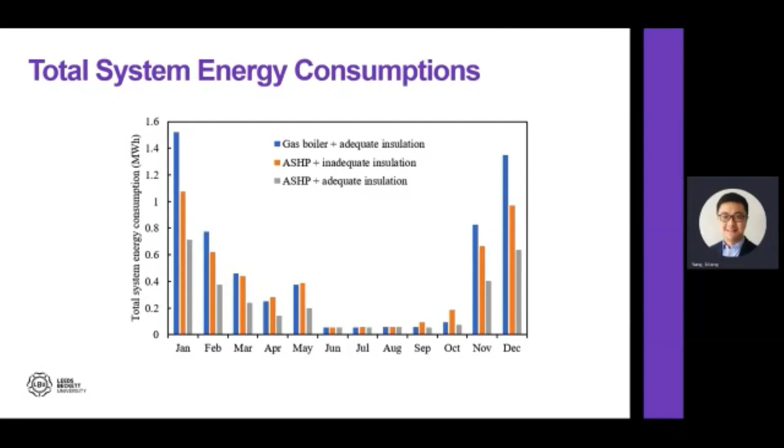The results of the system carbon emissions show similar trends to the system energy consumptions. As can be seen in the figure, the adequately insulated building with an air source heat pump system had the lowest carbon emissions over the winter months.

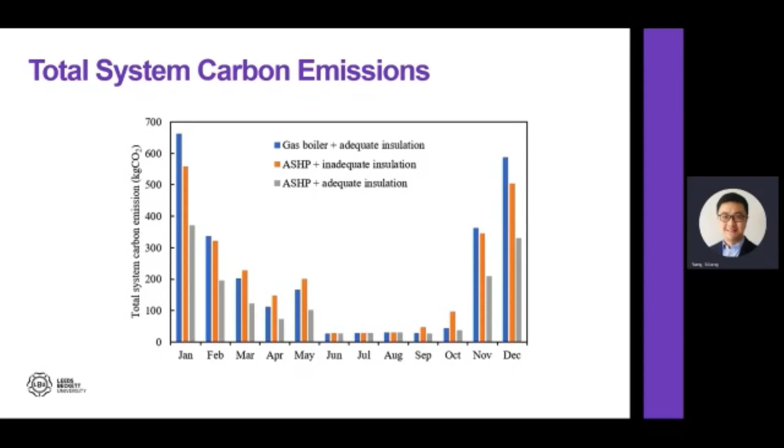The highest reduction of carbon emission using an air source heat pump compared to a gas boiler was around 44%, equivalent to 291 kilograms of carbon dioxide, found in January, while the inadequately insulated air source heat pump scenario still had a reduction of 13%.

In terms of the external wall transmitted heat losses, the results showed that when adequate insulation was provided alongside the heating systems, there was an annual mean 58% reduction in heat loss with reference to the inadequate insulation scenario, and this pattern was found throughout all months of the year.

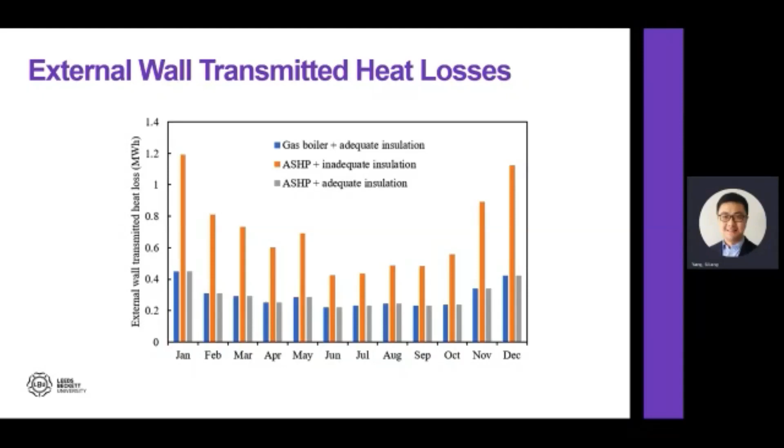The findings for the three pairings of heating systems with different building fabrics respond to whether insulating building homes is a first option rather than initially looking to completely change a heating system. The simulation results showed that the uptake of a more sustainable heating system, such as an air source heat pump, may not always make less overall impact on the environment.

In some months of the year, a gas boiler system equaled or even bettered the energy performance and carbon emission levels than an air source heat pump system with inadequate insulation for the building. Having a lack of adequate insulation was proved to be worse for the environment.

The results presented in this study also reveal that pairing with adequate insulation was rather crucial on top of the improvement of heating system efficiency.

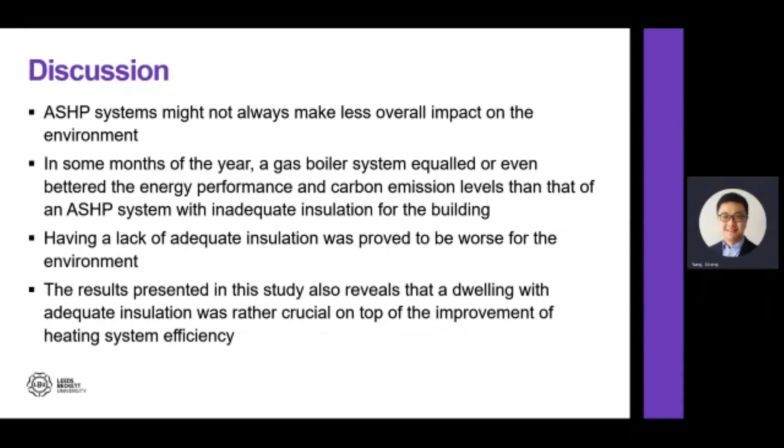If we conclude this study based on the IES simulation for the multiple design options of a typical UK dwelling with heating strategies of gas boilers and air source heat pumps and the building fabric insulation pairings, the optimal design option was found from a sustainability and feasibility outlook.

Basically, the results showed that adequate insulation was imperative to exercising an air source heat pump's maximum potential in heating the dwelling. Otherwise, the system might not be significantly better than conventional gas boiler systems.

Specifically, the optimal design option could reduce energy consumption by up to 53% and carbon emissions by 40% compared to conventional methods during the heating period.

This study somehow identified, in the UK context, conceptually preliminary solutions in addressing the gap between the adaptability of low carbon heating systems and uninsulated dwellings, which will contribute to achieving low impact domestic heating and therefore ensuring residents' well-being in a sustainable way.

Moreover, this study and its subsequent research can serve as a role model for synergetic research and the development of low-impact domestic energy systems and housing retrofits within the Global South context, in response to environmental deterioration globally.